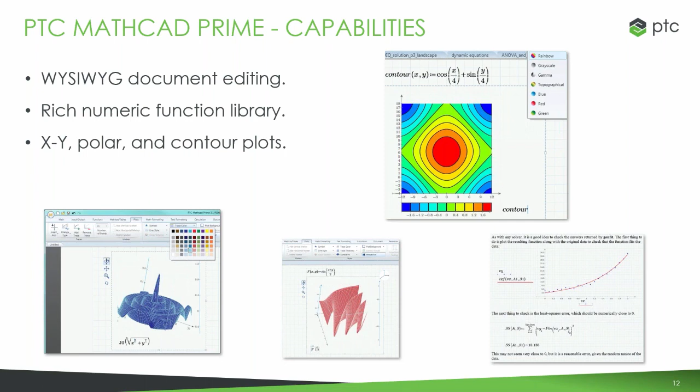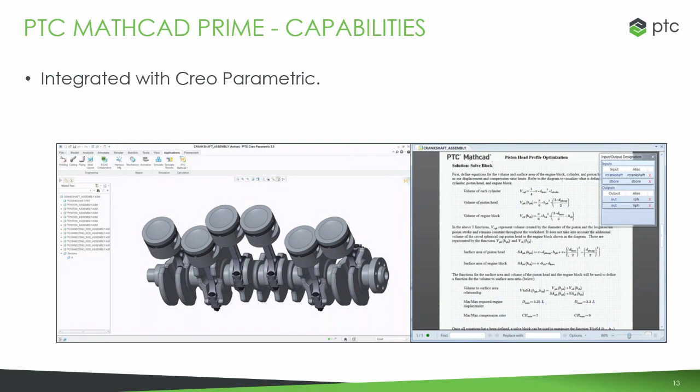One of the biggest things that we strive for in all the products working with PTC and EAC is the ability to coordinate and work together between programs. So we can take values from Creo, put them into Mathcad, do some calculations, and then go ahead and send them back. Maybe that determines something in the model. That certainly helps with documenting the design intent—showing with the model how those calculations are being utilized, and using those calculations to help drive our analysis. Likewise, we use that analysis to maybe further our design.

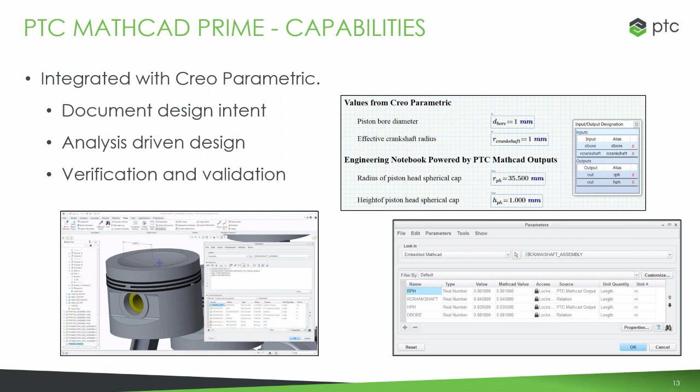With all this, we're really further validating our designs. We can check a design change and have that documented. For example, if I change the inner diameter of this bore, what's that going to do to my factor of safety? Are we staying within a certain range? Now let's step over and actually see what this is going to look like over in Mathcad itself.

Okay, here we go. So I'm going to jump into this document that we have laid out here. And the first thing to notice is that this is going to be pretty simple, very similar to working with a Word document. So take things, format text, do whatever editing we need to do in a way that we're used to.

That's one of the main value points I really want to highlight in this, is that it's extremely user-friendly. It's going to take little to no time to actually get used to working with it. Even that default layout shows that grid-like paper I mentioned, and this is a pretty good start. So now with that built out, let's dive in and start to see some of these capabilities in Mathcad.

Here we're setting up a section for a beam deflection. So let's set up that diagram. You can see as soon as we double click on that picture, diagram, it's cross-referenced over in PowerPoint. So we're able to go through and make any necessary changes that we need, and those changes are going to appear right inside Mathcad as soon as we make them.

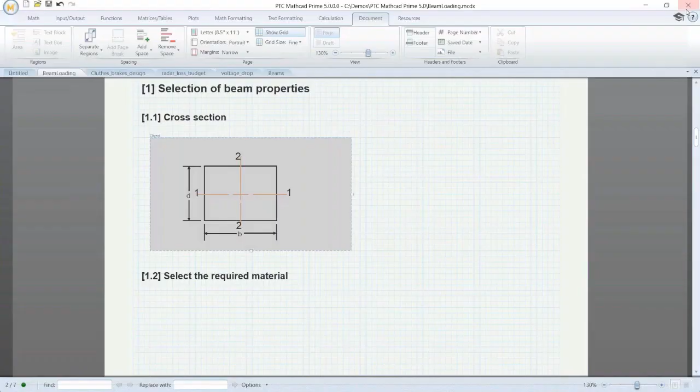Now we have this in, let's go through and do whatever calculations we need to do for this diagram. And with the natural math notation, it's the same process as we'd be doing in a notebook, going through defining variables, and once we have them all laid out, we can utilize them in our calculations.

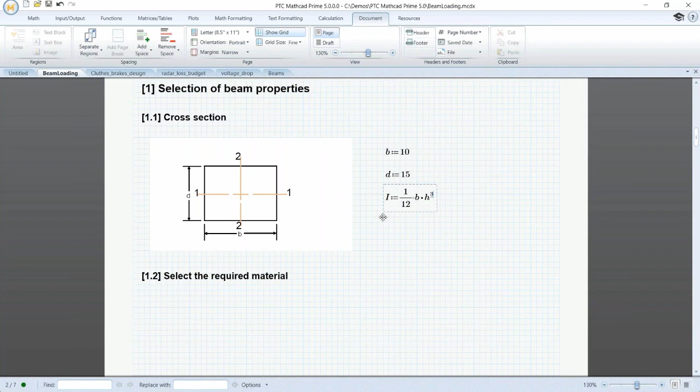Defining moment of inertia, b times d to the third, and actually we made a typo. So what's going to happen if we do this? We can see, hey, we got all these units. What's that h maybe that we used? And h is actually Planck's constant. We were able to quickly check with Mathcad and see that's not what we're going to use. So go back, change that off to a d, and see that our calculations down the line update automatically to solve the problem.

I mentioned earlier about units also. You can see as I start to define this, Mathcad's going to update the answer to reflect those units. And if I want to change them, maybe I want to go into another unit, just go ahead and do that, and the value from my answer is actually going to update with that.

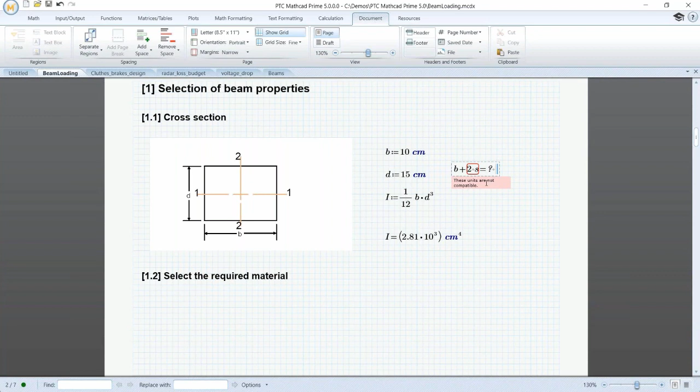Mathcad won't actually let us make a mistake. So if I say, hey, I'm going to try to add seconds to meters, it's going to say, don't do that. And really goes to show how Mathcad keeps us from making all those simple errors.

Most times we're going to have data from elsewhere, so there's a lot of capabilities for importing and exporting data. One option might be to utilize some data that you've gone through and collected in Excel. Well, you don't have to throw away that or retype it. Just leave it as is and just bring it right into Mathcad here.

Now that we've selected the data and brought it in, we can set that equal to a matrix called data. And now I can just ask Mathcad, hey, what's that variable data equal to? And it gives me that information. It really understands the information that's being brought in.

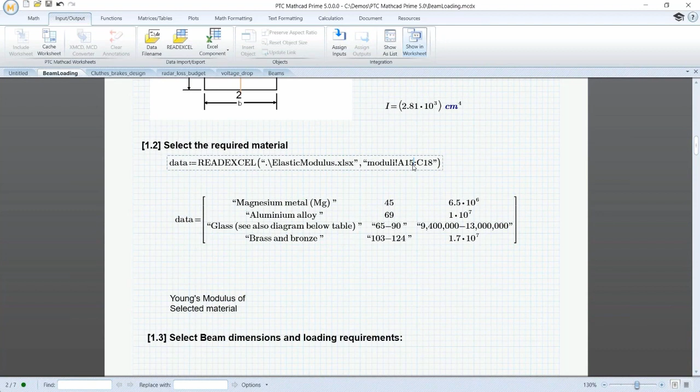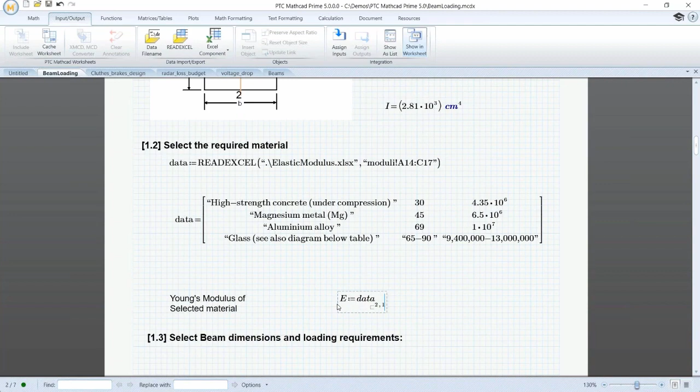So we can go back and change the range that we selected, and right there, we see all those values are going to instantly update in our matrix. Once we have all these defined, we can go ahead and use those in our calculations, and no need to code any of this. Just go ahead and ask maybe, hey, what's E going to be equal to in gigapascals? And boom, right like that, we have the answer.

All right, here we have another graphic. So let's go through and just define some variables. First, maybe lay out some beam dimensions, say length is 15, then go through and define the load for our study and say where the load is located. Again, type in all those units. Could even mix some dimensions, inches and feet, meters and centimeters, no problem there.

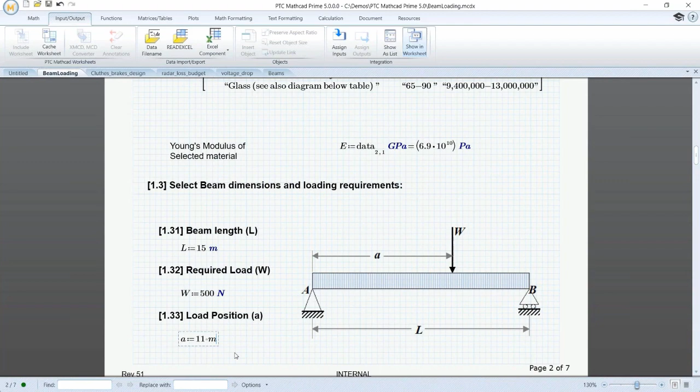Now we can go through and do our calculations. And the main thing I want to show off in this calculation section is the ability to password protect a certain area. This is really important for intellectual property. Maybe you have things that are changing, only want certain people to be able to edit this. We can go through and just say, hey, let's password protect this, make sure the wrong people aren't getting into this.

And here we can see all those equations I laid out for the study, just typed out as I'd have them on a sheet of paper. With that, I can simply type in what I want to find. Say I want to find deflection at L/2, and I have my default set to meters. I can easily type that in as millimeters and get a value in the spot exactly how I need it.

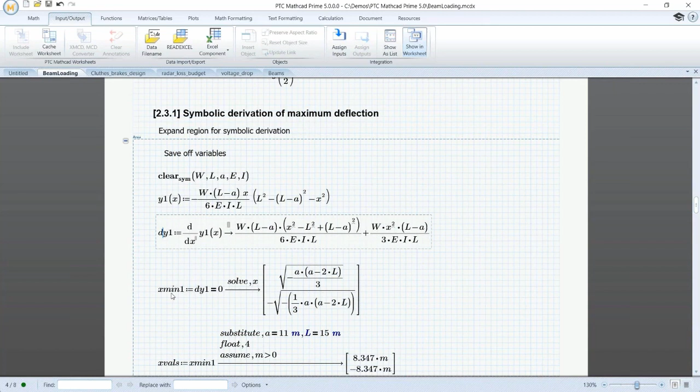We could do math like that, or we could do symbolic equations showing exactly how we got somewhere. Maybe we want all these calculations, but we don't want them showing up in the final sheet. We can go through, do the equations, derivatives, solve for x, but simply close out that region from being seen afterwards. It's all still right in the document, but now it's hidden. Me or anybody else that needs to can go back and reference that if they need to, and we're still going to have all the information.

We'll touch on these plots in a minute. First I want to look at how we actually view this data. Similar to how we did earlier, let's double click on that file and maybe make some formatting changes that we need to do, make the text bold or something, maybe have it centered just to make it look nice. When we close that out, we can see that the component is updated for us.

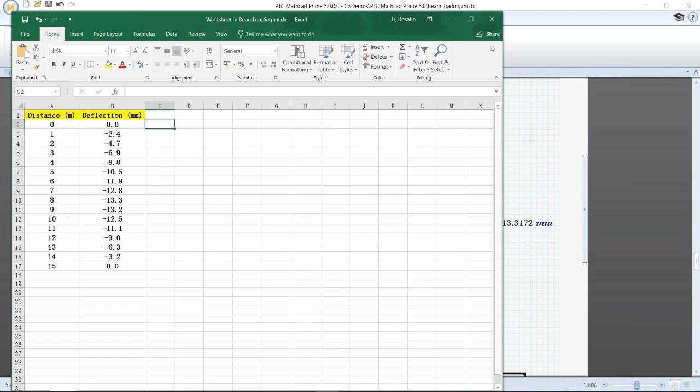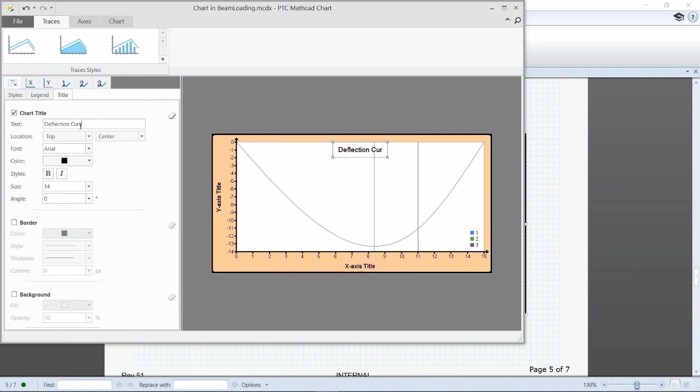Now I want to go ahead and open up that plot data below. With this, we can see that it's getting across some information, but it could definitely use some work. You can see we have all our formatting options right here on the left. We don't have to go searching for where we format the legend versus where we format the title, all in one concise location. With that, we're starting to give context to whoever happens to be looking at the graphic. There's no need to guess, 'I think this blue curve has something to do with our deflection.' None of that. We want accurate and concise graphics.

So let's do just that. Define what each axis is displaying, give some value for the information that's being displayed. We have full functionality when it comes to differentiating between every piece of information from the next. We don't want the user to be the one that has to decipher what each line means. Let's clearly lay it out for them. Edit the legend, say exactly what each thing is here, play with the line style and thickness to really add that level of differentiation between our data.

Finishing up each line here, adding in whatever I feel is necessary to fully define the results of my study. And these multi-line features is something that was really only made possible with the latest release of Mathcad 5.0.

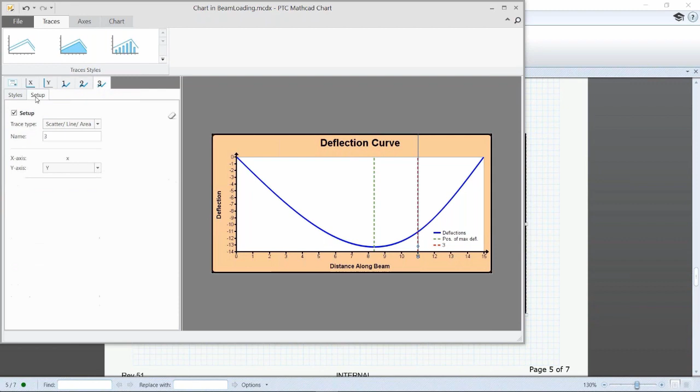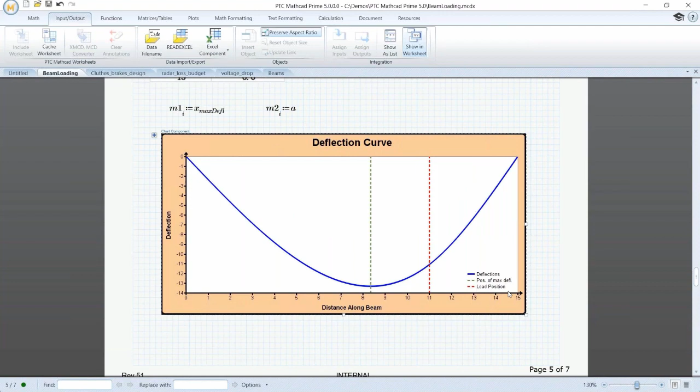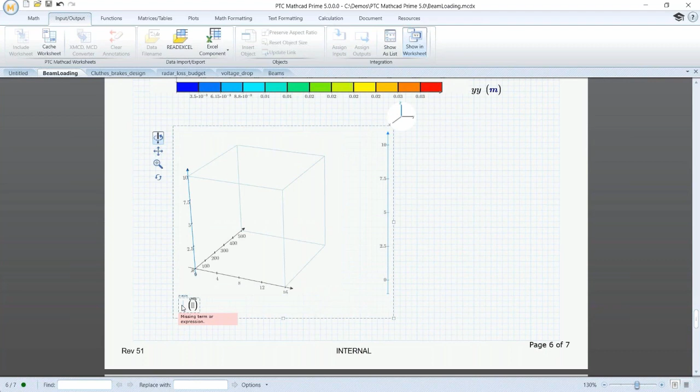Okay, so looking at this, I've built out my legend, and I really like the way this looks. It pretty much tells everything that I want to say with my information here. You also have some further calculations laid out in the appendix, and what I really want to do is take a closer look into a graph at the bottom here. This is a 3D graph that we can actually edit live, and has the same ability to format and color like we did with the 2D plot.

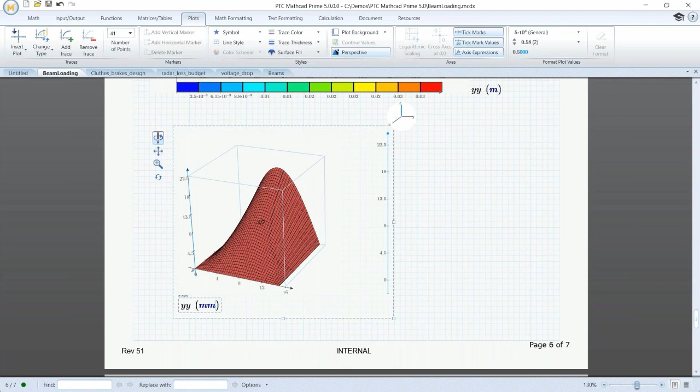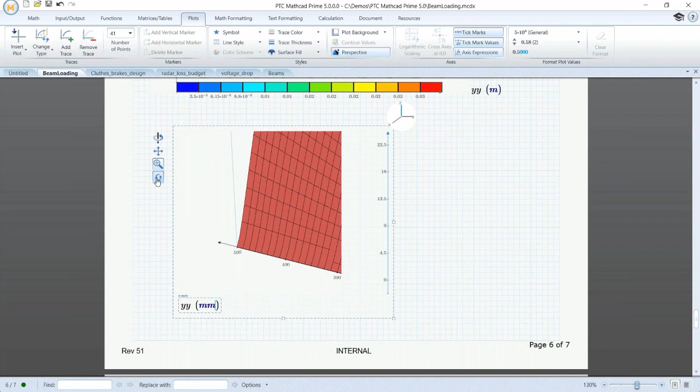We can also see that we can rotate this around, move the graph, and really show the view that we find the most meaningful. We can zoom in and really start to interrogate any element of the model that we want more information on, so we have full functionality with that. With that, we've fully documented every step of my engineering design process in a clean and efficient way.

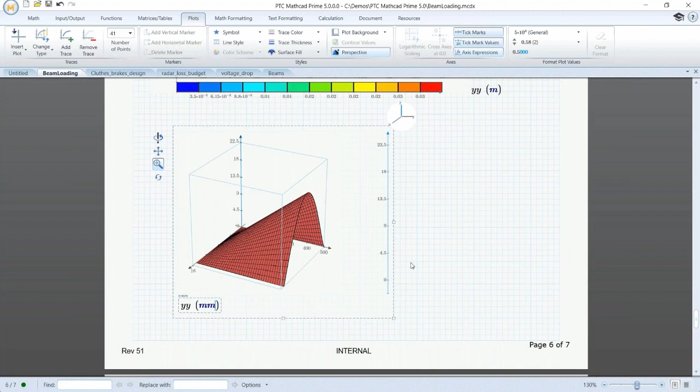So, stepping back into the deck, let's take a closer look into some of the enhancements that we have with some of these recent releases of Mathcad.

First, with Mathcad Prime 4.0, we have some performance enhancements, specifically when working with Word documents and Excel data. We've also beefed up our plotting abilities like we just saw, able to plot a lot more points much more effectively now. We saw our ability to password protect certain areas - touch more on that in a minute - and let's actually jump right over into there.

So with content protection, I want to take a closer look into this. Any area that we're worried about, we have full disclosure there. I have an option to add in password protection or simply leave it unprotected. We could also have the option to have a timestamp required for accessing certain areas. Another option is the ability to simply lock the display state for certain regions. That means we can either have something locked open so everything's visible, locked closed so everything's hidden, or simply leave it with no area lock. That's all up to you.

Touching on Mathcad as an OLE container, that's what I mentioned with double clicking on the PowerPoint image. Instead of having to search through my computer to open up a file I'm interested in, I just have the program open that up automatically. The same thing went for whenever I clicked on that Excel data.

Here's what we're talking about when we're able to copy and paste multiple regions into other applications. So if for some reason we needed to share this data off and bring it into, say, a Word file, all you have to do is keep that source formatting from Mathcad, and we can take those different regions and copy them over. It's going to look exactly like we did over in Mathcad.

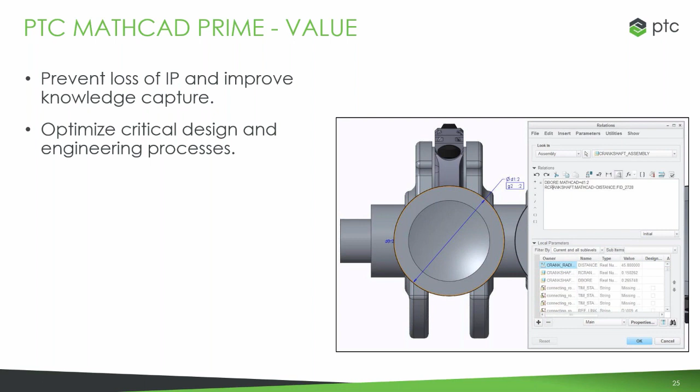Now we're fully optimizing our designs as well, because we can reference every part of the design process and ensure that each step we took was actually done in the best possible way. Overall, we're improving the quality of our designs, with no errors slipping through the cracks, because we actually understand each variable being used in the process.

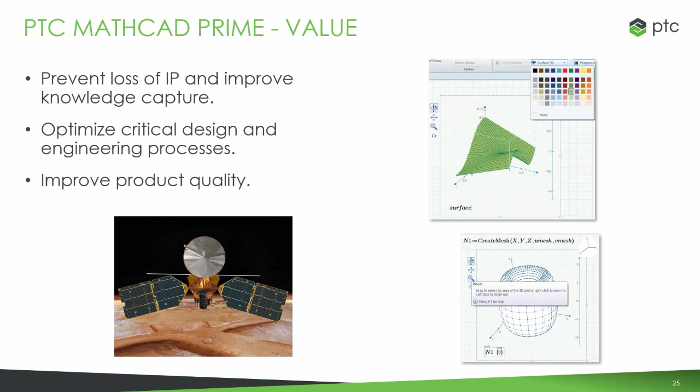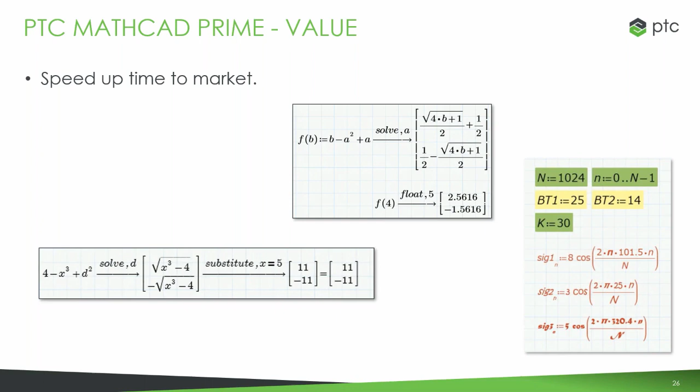We have all these equations and a system of equations maybe laid out, and we can reuse that system. It's so much faster than if we did that all by hand on a notebook. Again, it cuts out the risk of making an error that might occur if it was done by hand or by somebody with pen and paper.

And possibly the greatest value we see here is in regards to compliance. More and more today, we have to lay out exactly everything we did and show exactly what we did at each step in the process. Now, with doing all our calculations in Mathcad, we're able to show that off to anybody, whether internal or external.

And that's really the last piece of the puzzle with Mathcad. We've done all of our solving and analysis, it's been documented and stored, so now we're ready to collaborate and share that design off with anybody and everybody.